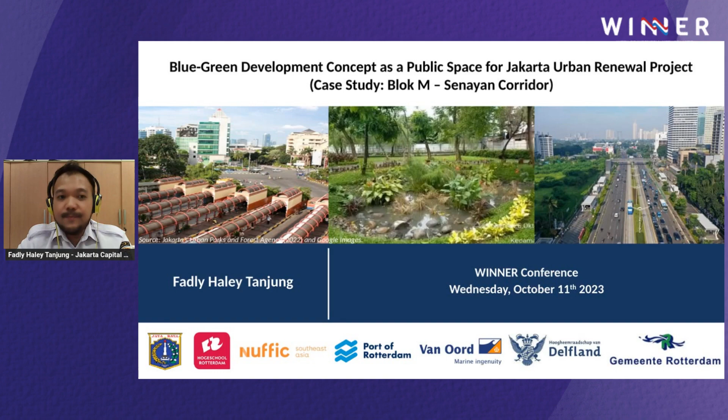Here's a glimpse of Indonesia, a tropical archipelago country with 38 provinces, with numerous urban population projections that are expected to reach around 319 million in 2045. One of the main metropolitan areas is Jabodetabek, covering Jakarta, Bogor, Depok, Tangerang, and Bekasi, with around 35 million people living in the metropolitan area.

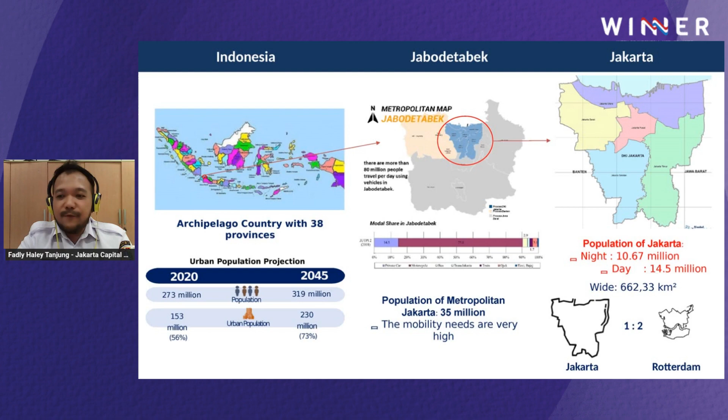Jakarta itself has around 10.67 million population during the night and around 14 million people during the day. It's around two times wider than Rotterdam's area.

Based on several studies from NASA, BRIN, and also INDEF, Jakarta has serious issues of groundwater, with as much as 40% of the city now sitting below sea level. The flood area will be approximately 160.4 square kilometers, or around 24% of Jakarta's total area, and it needs comprehensive mitigation and adaptation efforts.

Based on INDEF reports, around 10 trillion rupiah and more than 30,000 people spread across 264 spots will be affected by this flooding in Jakarta.

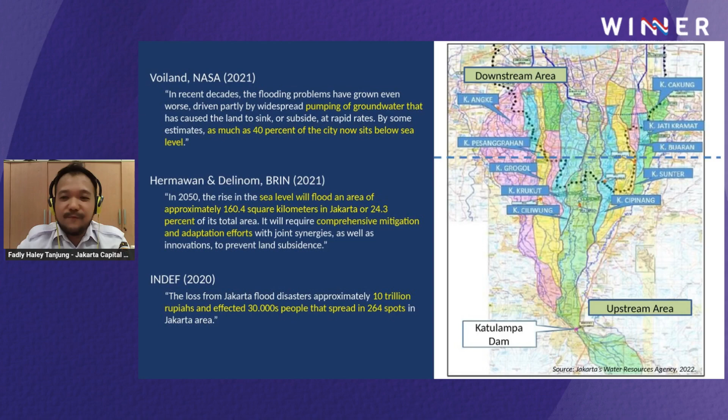Jakarta itself is also laid out by 13 main rivers flowing from the southern area, from the Bogor and Puncak areas.

Jakarta has some very strategic flood-related issues. First is the waterfront city concept—it used to be planned and designed with a canal system, and with this physical characteristic, Jakarta is home to water and floodplains.

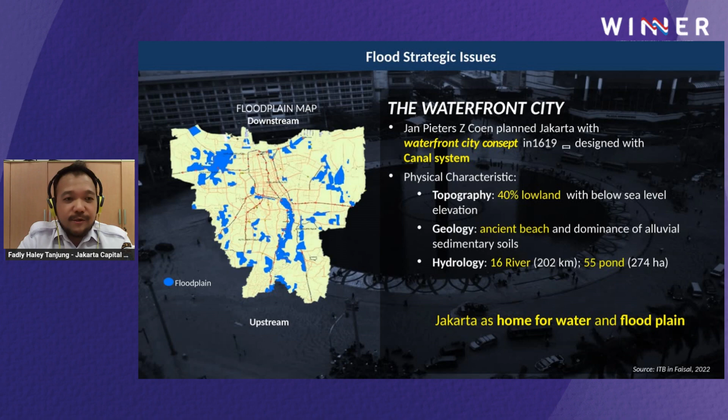The second strategic issue in Jakarta is water scarcity: around 80 to 85% of groundwater is below the national health standard of Indonesia. You can see on the map that the red areas have damage of more than 80% lowering of the groundwater level, and the raw water sources mainly come from the Jatiluhur Reservoir, with only 3% from the Jakarta River itself.

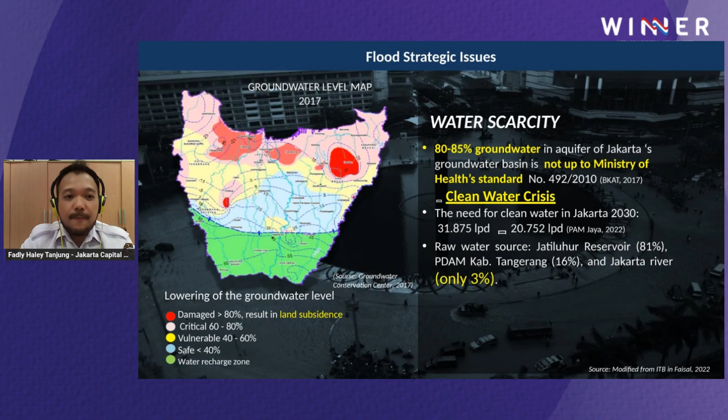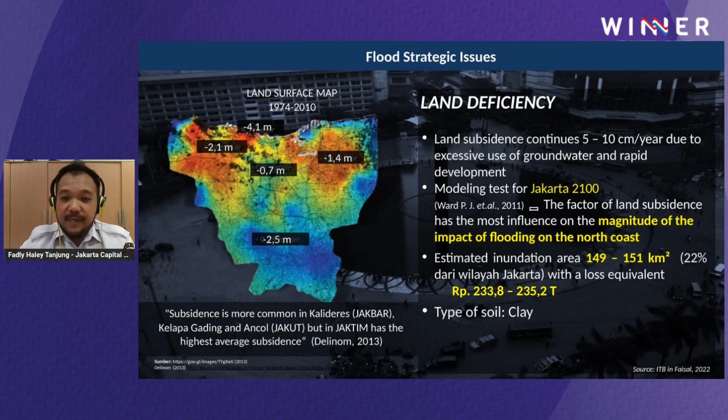The third strategic issue of flooding in Jakarta is land subsidence. Based on modeling tests for Jakarta in the year 2100, it is projected that land subsidence has the most influence on the magnitude of flooding impact on the north coast. It's estimated the inundation area will be around 149 to 151 square kilometers, with losses equivalent to more than 233.8 trillion rupiah. The type of soil in Jakarta is clay.

There's a planning paradigm based on simulations done by researchers, noting that green open space does not have a significant impact on reducing runoff discharge, so integration is needed through blue-green open space development.

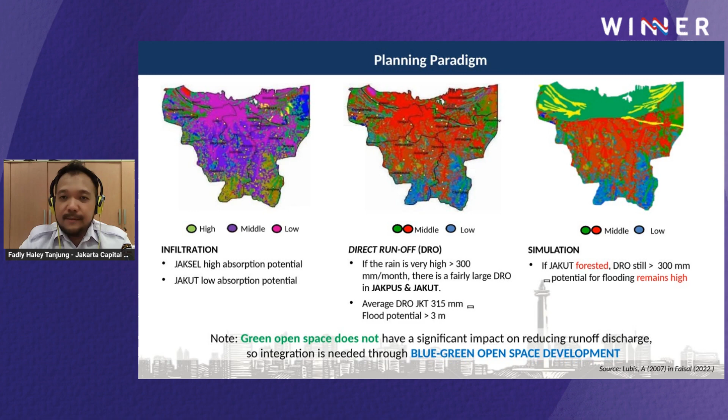Maybe you may have already known about the plan to relocate the capital of Indonesia, announced by the president since 2019. The national government plans to relocate the capital, and Jakarta will become a global city afterwards.

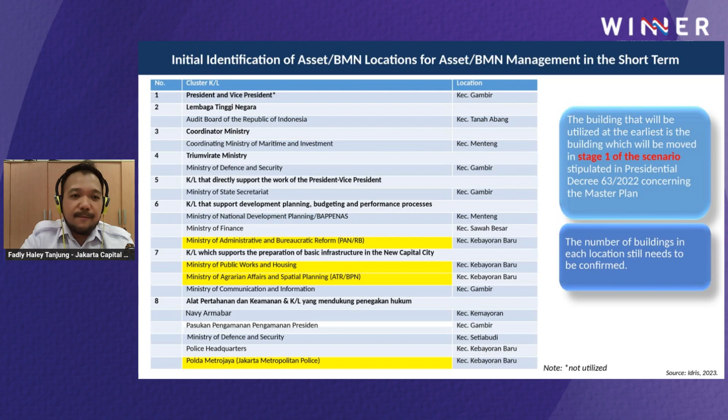Based on the initial identification of asset locations from the national government, several ministerial or government-owned buildings will be relocated in stages. The first stage of the scenario will affect four buildings that are included in my case study area, which is the Blok M until Senayan Corridor.

So this is my case study area. As you can see, there's this delineation approximately from Blok M until Senayan, and I chose this corridor because I think it's the more connected backbone of the area, and mainly the activities of this area rely on this backbone.

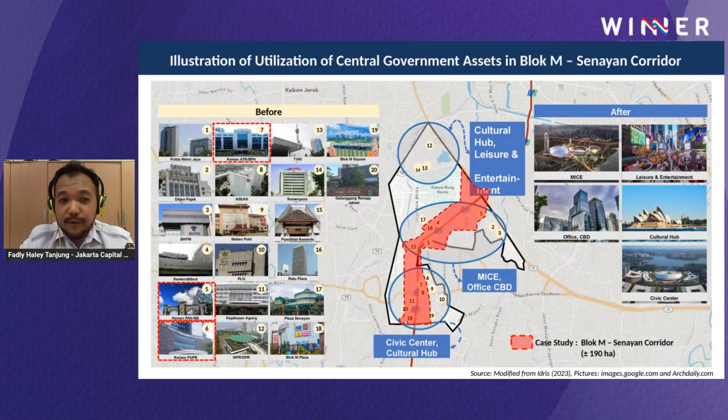So I chose the corridor that also consists of public transportations. The case study area is around 190 hectares.

So my basic research question is: how to plan a blue-green development concept as a public space in the Blok M Senayan Corridor. The purpose is to plan a development concept of this blue-green infrastructure as part of the Jakarta Urban Renewal Project.

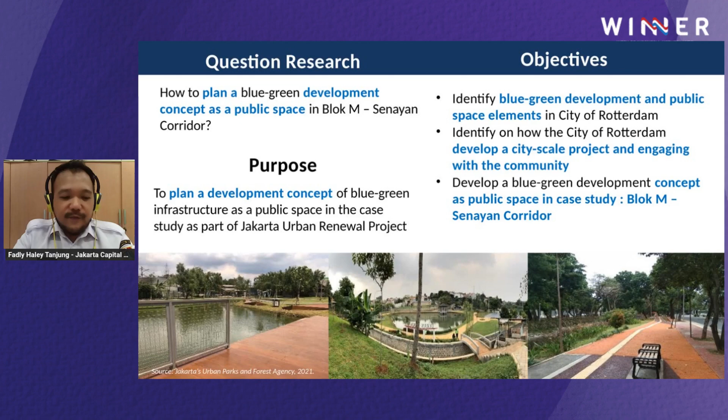So there are some problems I identified in this study. Some of them are that there are 3 sub-districts in the case study area that were still inundated during heavy rainfall in 2020 until 2021. There are also limited assets owned by the Jakarta Capital City Government, and the stakeholders within the case study area are identified as varied, regarding public, private, and individual ownership.

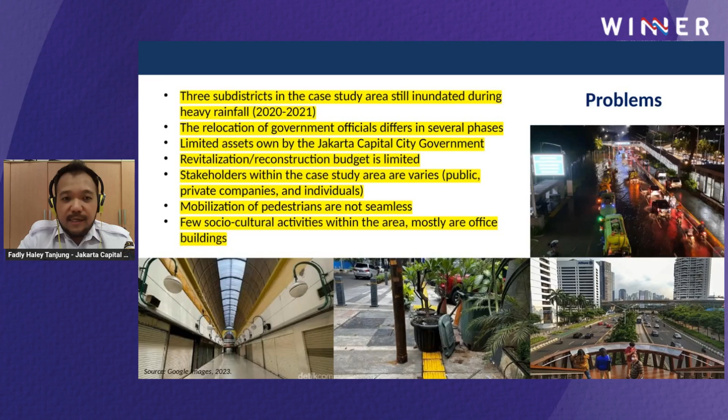There are also few social cultural activities within the area, mostly office buildings. But there are also opportunities inside this case study area, as some parts will be included in the CBD, which can be highly potential to become an economic engine for Jakarta toward becoming a global city.

It also lies near the ASEAN Secretariat, which is planning to develop into a larger scale. Currently, there are several strong activities in the case study area, for example the Gelora Bung Karno City Forest, the M Bloc Space, and the Martha Christina Tiahahu Literacy Park.

There are also some local regulations of incentive approach that can be drafted. It's also important to promote seamless mobility, which can be integrated with transit-oriented development or public transportation stations.

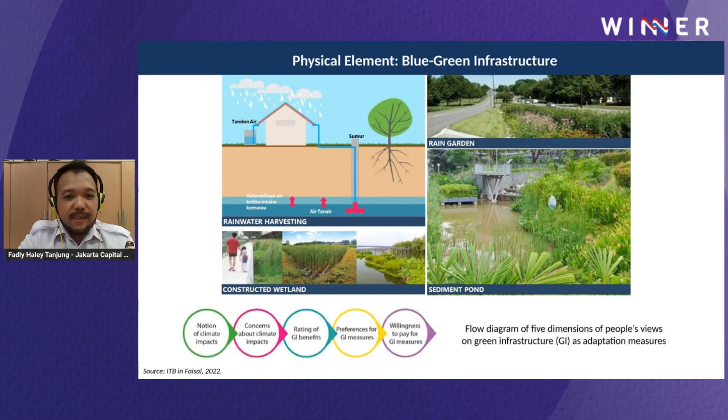So this is some theory I researched regarding the physical element of blue-green infrastructure, for example rainwater harvesting, constructed wetlands, rain garden, and sediment pond. There are also examples of porous asphalt or concrete and porous paving that can be used for pedestrians in inundated areas.

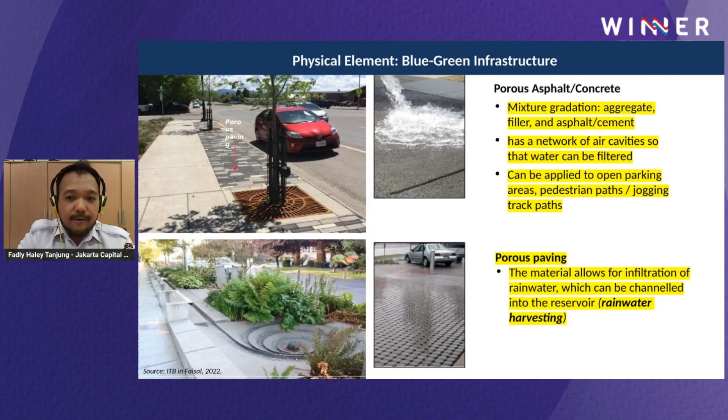These are some theories I chose about placemaking regarding the social cultural element, which is public space with placemaking as a third space development. Why third space? The first place is our home or living, the second place is our workplace or school, and the third place is between our home and our workplace or school. So there will be many activities between them, including leisure, recreation, and entertainment. This public infrastructure and amenities hold the key factor in creation of the third space.

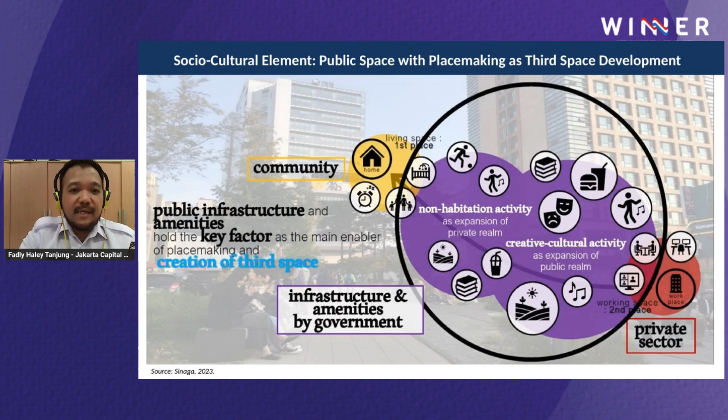So we dig into some locations that I observed during my internship in Rotterdam, identifying some physical and socio-cultural elements, as you can see in the presentation.

In Dakpark, for example, you can identify green wall and rooftop garden. There's an example of using sport activities and an amphitheater in the Benthemplein Water Square, which is actually an excellent example introduced by the city of Rotterdam to integrate urban water management and flood mitigation with urban space and public space development.

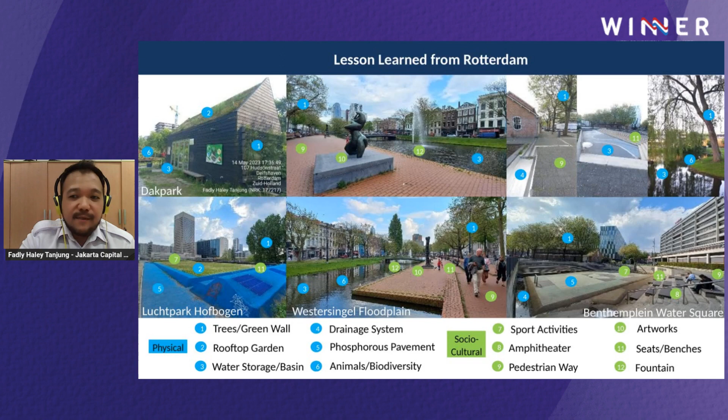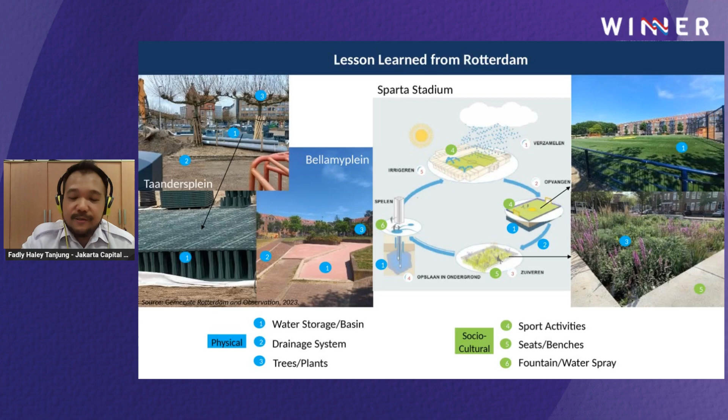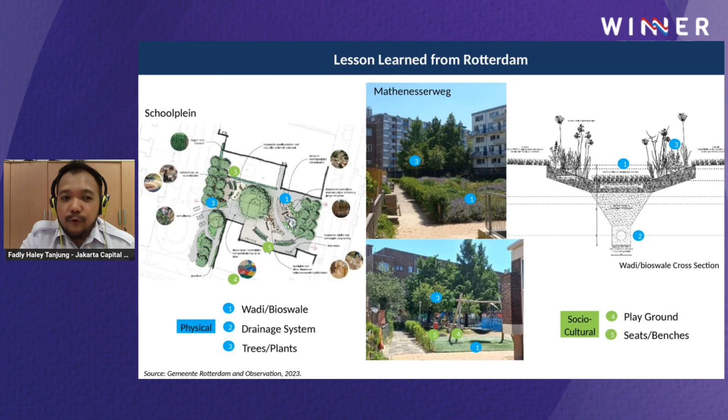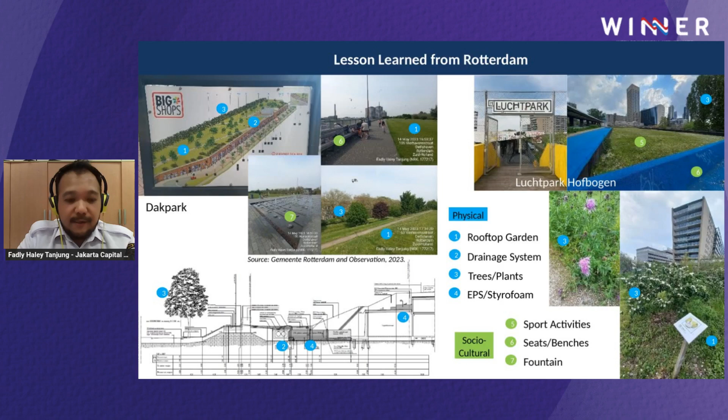So the city of Rotterdam built excellent examples of these urban parks, using buildings previously used for storage, and using EPS or styrofoam to maintain the soil above the building so it will not tip during development and during heavy rainfall.

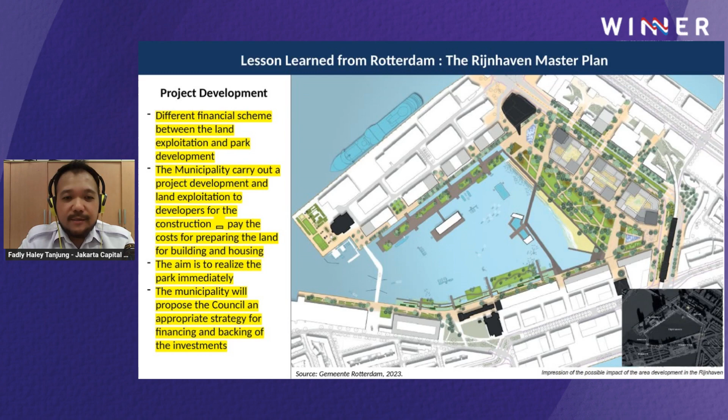Regarding the lesson learned from Rotterdam about project development, I identified some ideas currently conducted by the city of Rotterdam. One of them is the Rijnhaven master plan, which has a different financial scheme between the land exploitation and park development. The municipality carries out project development and land exploitation to developers for construction, and they aim to realize the park immediately while securing some funding by the municipality, proposing to the council to secure the financial scheme.

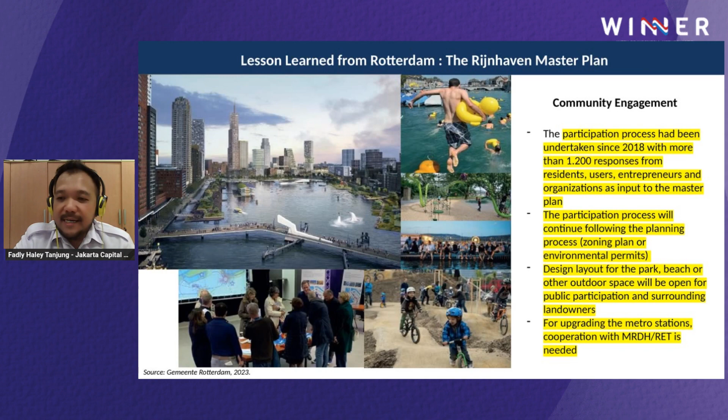Regarding community engagement on this project, the participation process had been undertaken since 2018, with more than 1,200 responses coming from residents, users, and entrepreneurs. So it's basically a very good participation example done by the city of Rotterdam for this large-scale city project. This is also a good coordination for upgrading the metro stations, cooperating with RET as the operator of public transport in Rotterdam.

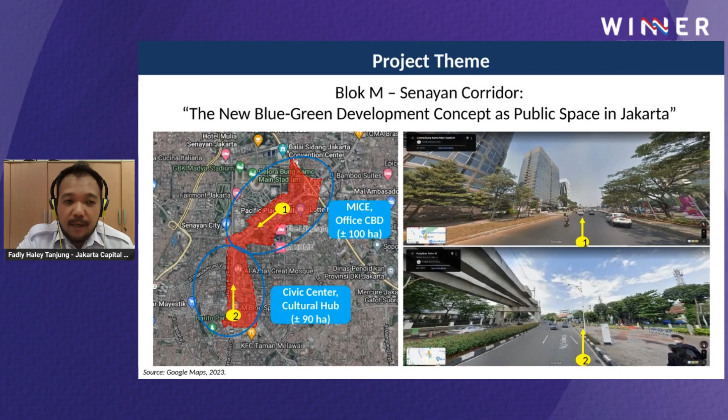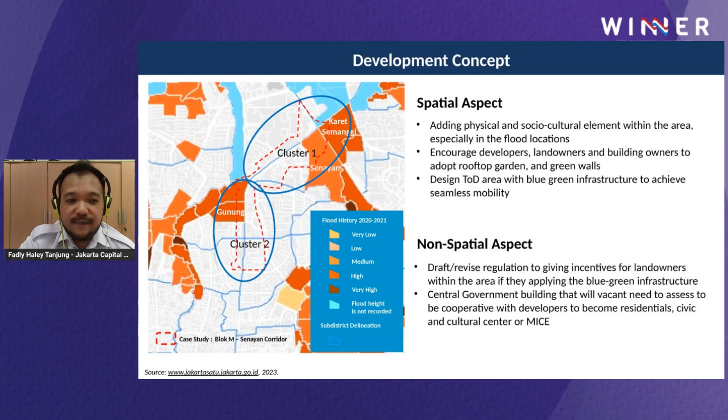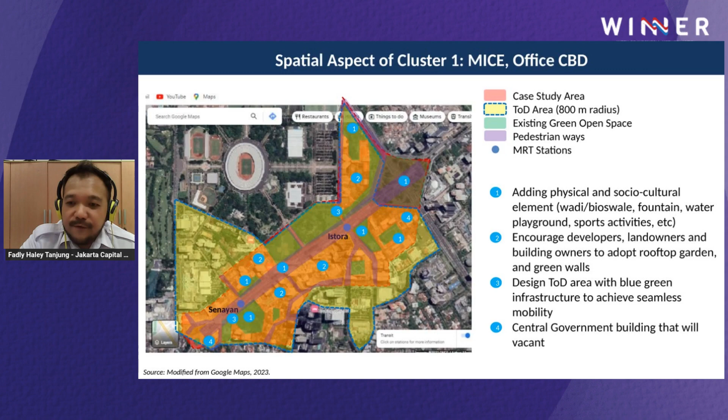So we're getting to the first cluster in the spatial aspects. I identified several examples in the existing conditions, so I'm suggesting recommendations in several spots regarding adding physical and social-cultural elements, encouraging developers, designing the TOD area, and identifying several spots of central government buildings that will be vacant.

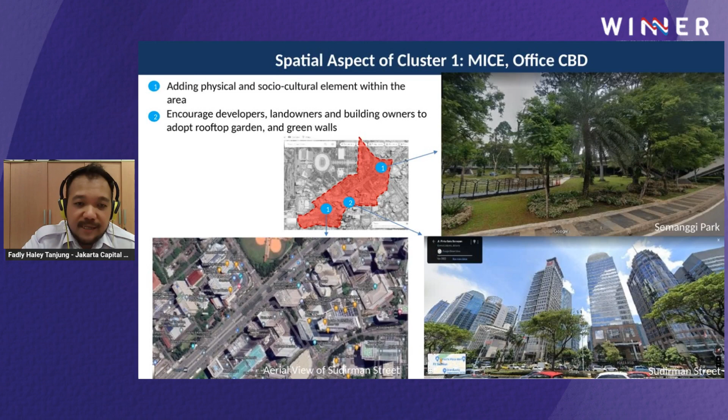This shows some pictures of these areas in cluster one: Semanggi Park, Sudirman Street, and some aerial views of Sudirman Street. I suggested adding physical and social-cultural elements in Semanggi Park with a water fountain, benches, more trees, and water elements, and adding green walls and a green belt in Sudirman Street, as well as applying green rooftop gardens above the buildings in the Sudirman Street area.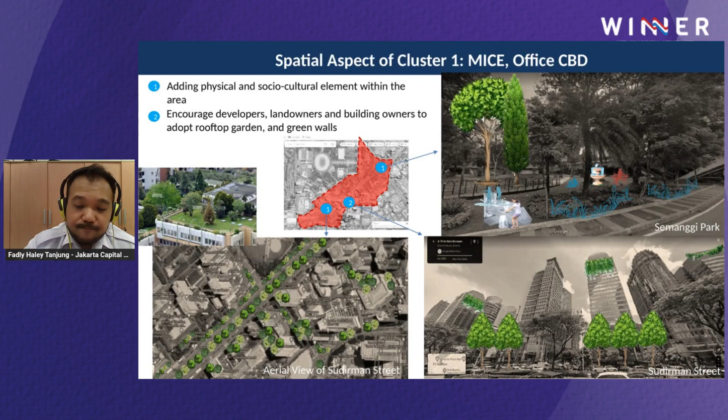Another example in cluster one regards the Ministry of PAN RB, the bureaucratic ministerial building. It can be redeveloped or revitalized into a new building using the compact city approach, possibly built into a new landmark—for example, like the Depot building in Rotterdam. In the parking lots, water storage or water crates could be introduced to store water during heavy rainfall, because this area is close to the inundation area of the Gunung sub-district mentioned before.

There are also suggested illustrations for Sudirman Street, adding green belts, trees, and bushes, and for vacant land currently owned by private sectors, which can be cooperated with to also introduce water elements in their area.

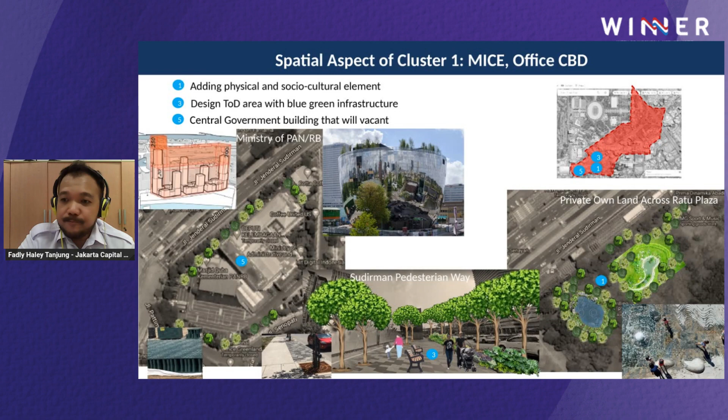So in cluster two, which will be planned into the civic center and cultural hub, I also identified some areas here.

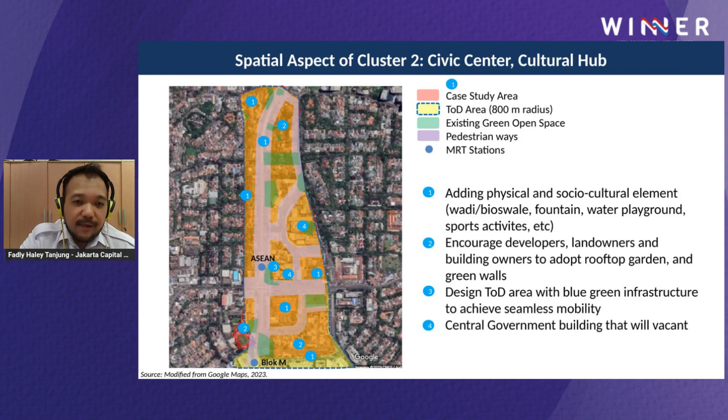There are two MRT stations in this area, the ASEAN and Blok M MRT stations. First, there are several locations of the Ministry of Foreign Affairs owned by the central government, and also some high schools, SMA 82, owned by the Jakarta provincial government, that can introduce the same concept as the Benthemplein Water Square in Rotterdam, or introduce some rooftop gardens.

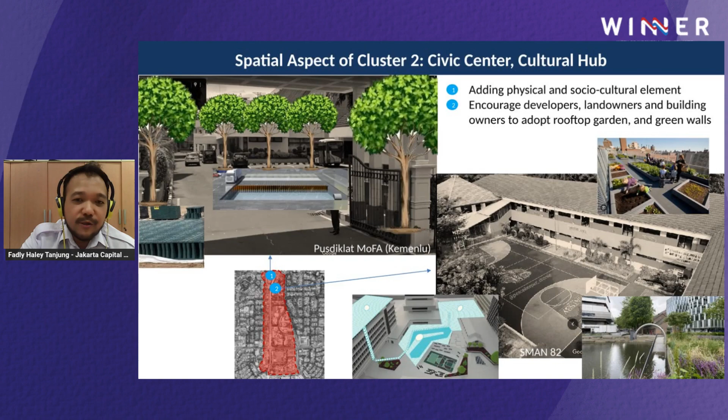Since it is located in the inundation area, it can be suggested to adapt the concept of urban water storage. These are some examples I illustrate for the redevelopment of the ministerial building, for example the Ministry of ATR or Spatial Planning Ministry, and also adding some social-cultural elements in the Blok M area and a pedestrian way at the entrance of the Blok M terminal.

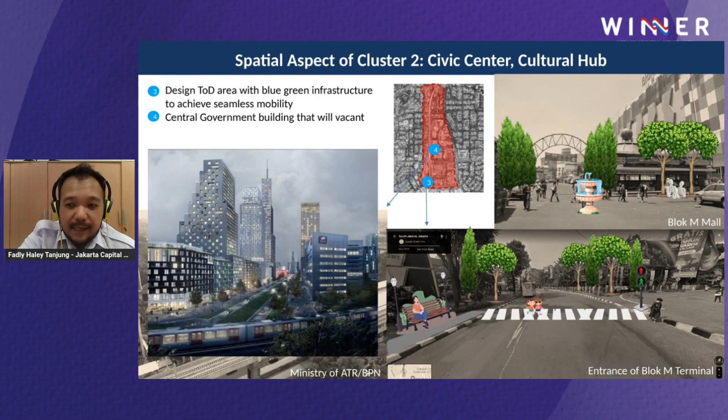Regarding project development and community engagement of this case study, I suggest a specific project development team is needed, and the municipality needs to propose to the council to allocate budget for the master plan. The aim is to realize several public spaces in the area immediately. The 4 potential central government buildings need to be assessed as residential, civic, or cultural center, also need to be assessed with the central government, and they need to draft the incentive regulations within the area and its surroundings.

The next part is community engagement. After the master plan is drafted, it's important to conduct workshops and open public participation in all media, especially targeting inhabitants and other stakeholders from children, women, youth, diffable within and surrounding the area. Detailed designs for public space using the blue-green development concept should be open to public contests. There is also potential participation by landowners who can support seamless mobility to the TOD area and new public space development.

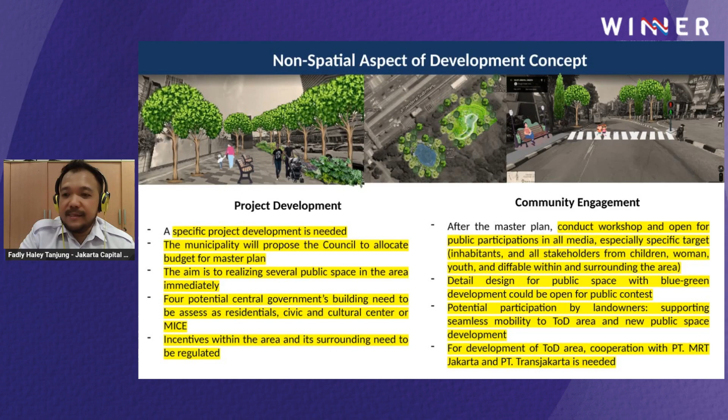It also needs to be cooperated with public transportation operators, for example PT MRT Jakarta and PT Trans Jakarta.

So this is my suggestion for the action plans of the project, from the short term - the first 2 years - to the long term, the third year until maybe 10 years ahead. First, I suggest forming a specific project development team, to allocate budget and draft the master plan, etc.

In year 2, it's important to conduct public consultation workshops. The campaign in all media should be started. Regarding the 4 central government buildings, the best utilization should already be decided, and the incentive regulations already set.

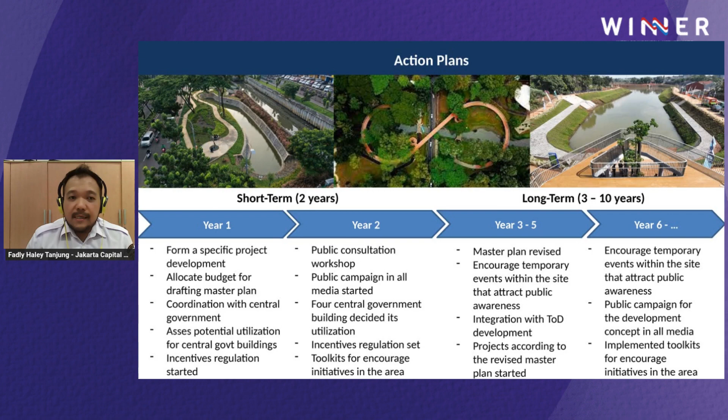In the long term, it's important to revise the master plan due to the needs of the people and the area itself, and to encourage temporary events within the site that attract public awareness, and to integrate the stations within the area to develop it with the TOD, or transit-oriented development, concept. It also needs to be maintained in the longer term after this.

These are some initiative toolkits that can be adopted by landowners and individuals in the area, for example introducing white roofs, water gardens, water playgrounds, water elements for evaporation, vegetation fences, and water permeable pavements.

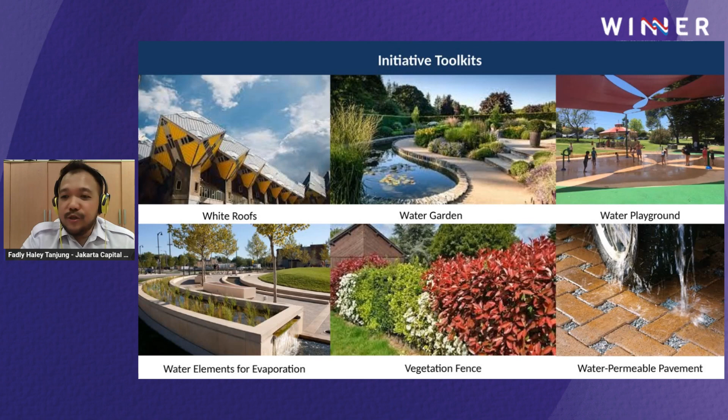Hi, Johan. Hi, Haley, and good day to everyone. Thank you very much for inviting me.

It's good to be here, and I would love to share some insights from Rotterdam on climate adaptation.

My name is Johan Verlinde, I'm the program director for the climate adaptation program for Rotterdam. I also do a lot of international cooperation on this topic, because as a city we like to learn from other cities around the world, and we like to share what we are doing, working together and sharing knowledge. That's really important - we all face the negative effects of climate change, one more than the other, but we really need to learn from each other.

Today I'm going to tell you a little bit more about our adaptation strategy, our international cooperation, and then I hope we have a discussion afterwards.

Rotterdam WeatherWise is our latest adaptation strategy, and it's really about adapting the public space, the private space, but also behavior, because we all need to work together in a city to make our city climate proof. A little bit more about the background of our city.

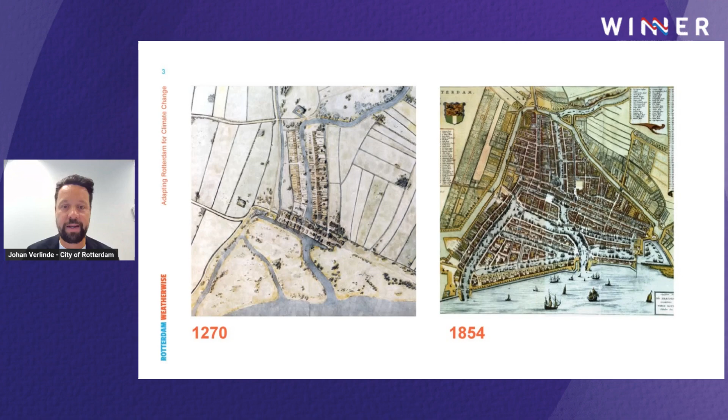So water is always in the DNA of the city, and Rotterdam always was a water city. We had a lot of canals in our city. But in the beginning of the 20th century, a decision was made to transform Rotterdam from a water city into a car city, because the car came to Rotterdam. Then the city council said, okay, let's fill up all our canals and transform them into roads.

So that's quite problematic. We don't have almost any surface water within the city, which means that rainfall is a huge problem, but also heat is becoming more and more a problem, because all that pavement, all the concrete, heats up during the day and radiates the heat at night. Buildings cannot cool down. And in the Netherlands, we are mostly focused on cold, so we have central heating but no air conditioning. So heat is also becoming more and more a problem in our city.

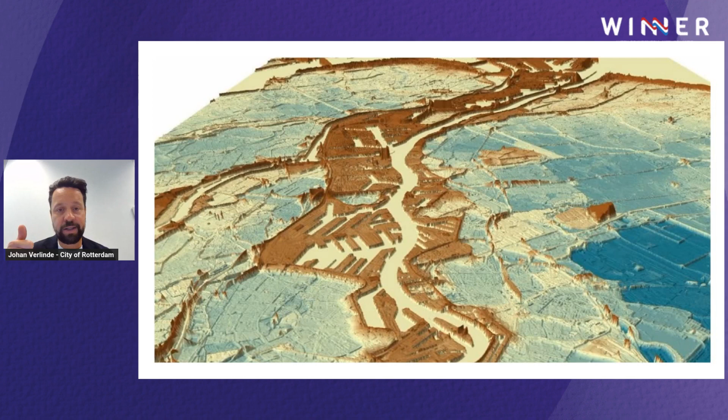But with climate change, we see higher rainfall intensities, more heat, longer heat waves, and it really has a strong effect on the livability in our city.

So we really need to work on the adaptive city, and we are doing that already for years. The current adaptation strategy is called Rotterdam WeatherWise, but it's the fourth iteration of our adaptation strategy. So we are working on this for years and years.

And I think the strong element on climate adaptation is multifunctionality. So it's not heat - it's not hot the whole year. It's not raining 100% of the year. So making sure that it acts as a reduction on the negative effects of climate change for one part, but also is an addition to the public space or an addition to the buildings in the city.

On a very detailed level, we did all the modeling, so we know on a building level what kind of problems will occur. Will flooding be a problem here, or rainfall and drought, or maybe only land subsidence and heat? So for every location in Rotterdam, we know what's going on.

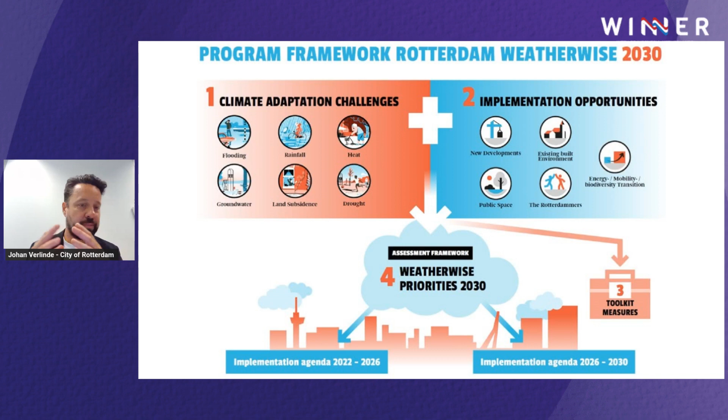And the dot on the horizon is 2030. So by 2030, our program is done, which doesn't mean that climate adaptation is done, but then climate adaptation should be a standard for everyone that does something with an impact on the city. So the city government, the citizen, the real estate developer, they all know what they have to do.

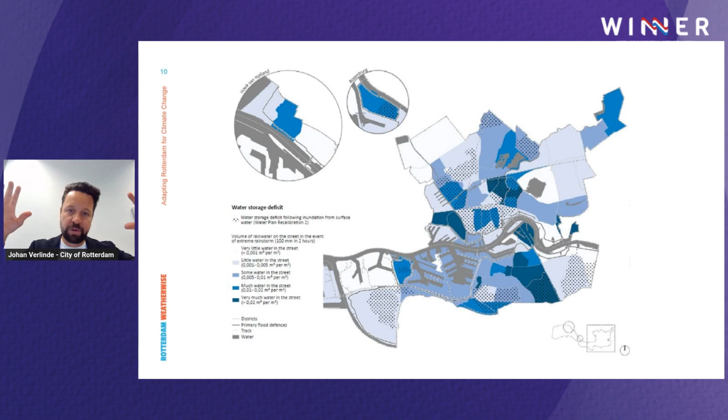And this is one of the maps. We have maps on a city level that shows you where there are problematic neighborhoods. So this one is on rainfall: where do we have a problem with water storage? Where is the water storage deficit? Which means in case of heavy rainfall, there's no way we can store the water. And the more blue, the bigger the problem is. So this gives you some overview of problematic areas in Rotterdam.

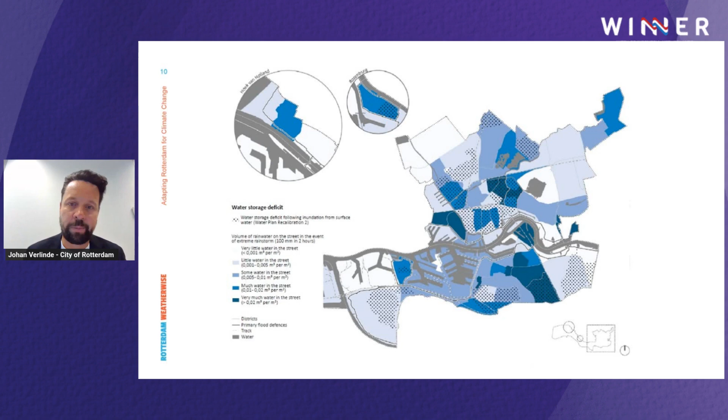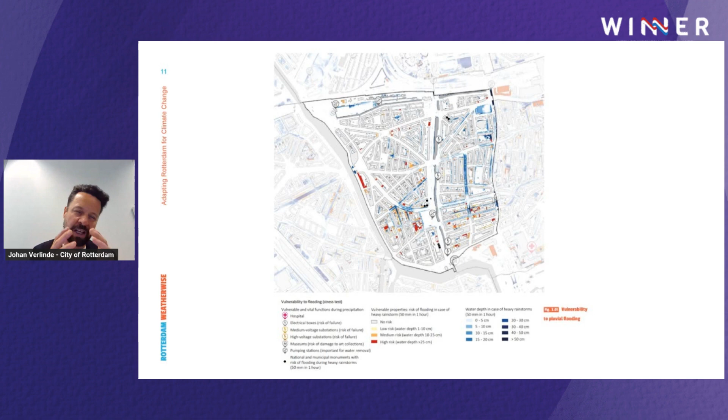And you also see the energy, electricity boxes, hospitals - they're all mapped on these vulnerability maps. And we have 15 of these for every neighborhood on different themes, which gives you a really detailed overview of what's going on in this neighborhood.

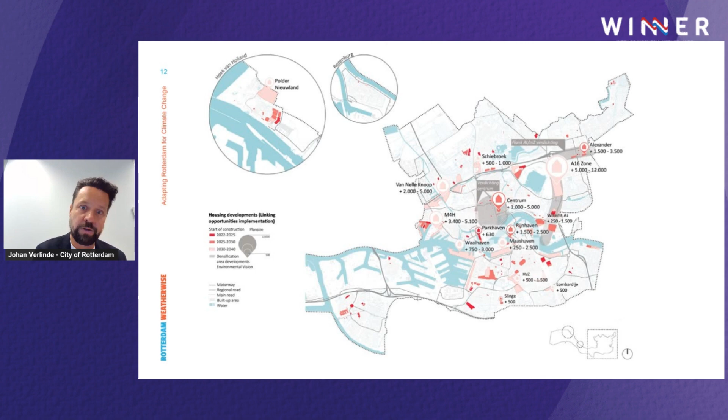And this is an example of a map that shows you where we are going to develop in the next few years. So all those buildings are a threat to the city if you don't do it in a good way, but also an opportunity to make those buildings climate proof from the beginning.

Well, let me give you some examples. And Haley already showed some of them in his presentation, which he adapted to his local case in Blok M.

And the first one is the water square. We started with this 12 years ago. We have now a lot of these all around the city. And it's about storing water, but also making the public space more attractive.

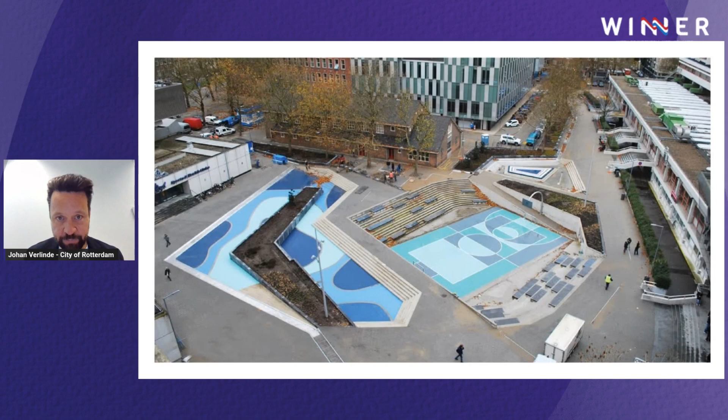And this is one of the squares in Rotterdam. It used to be totally paved with all those concrete stones, so a really dull and boring square in the city. But it was also a problematic area where we have a lot of problems during heavy rainfall. And then we invited all the potential users of this square - there's a school, there's a church, there are people working, there are people living there.

And we invited them all. And we said, okay, we want to make the square more attractive and we want to store water. So we ask you, what kind of functions do you want on this square?

Well, that's combined, so there are 3 reservoirs. The middle one is used for sports. Then there's a small one on the top right, and there's a stage because there's a theater school and they wanted a stage. The reservoir on the left can be used for skating and BMXing. And even the church has services on Sunday in the biggest reservoir.

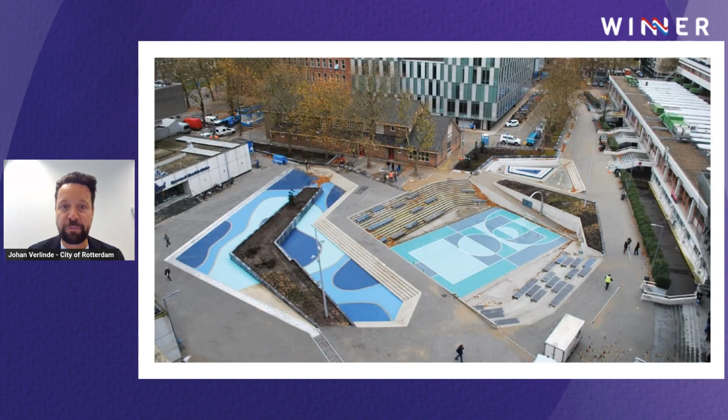But when it starts to rain, we can store 1.7 million liters of rainwater in here, which reduces the stress on our sewer system. After the rain event, it doesn't flow to the sewer system, it's infiltrated into the groundwater, but it's only used 5% of the time. The other 95% of the time, it can be used for all those different functions.

So when it's raining, it looks like this. You really see the water flowing. And it can stay in the reservoir for 24 hours, also because of health issues. After 24 hours, gates are opened and water can infiltrate into the groundwater.

And when the weather is good, it looks like this. So kids from the school have their lunch, it's used for sporting. And we have 10 of these around the city, and they all look completely different because every citizen or neighborhood has its own needs, so they're always tailor-made to the local conditions.

One of the bigger ones, and also new for us, because I mentioned water is always in the DNA of Rotterdam, but we always also saw water kind of as a threat to the livelihood in the city. So what we did is drain the water and get rid of it as soon as possible, making sure the city wouldn't flood. But now, with climate change, we are experiencing more and more periods of drought, which will also have a big impact on our fresh water supply. So we should also think about circularity and reusing the rainwater that falls on our city.

But the problem is, it rains in one month and you need the water in another month. So can we somehow connect those two dots? That's what we did with the concept of the urban water buffer. And the first one was implemented near a soccer stadium.

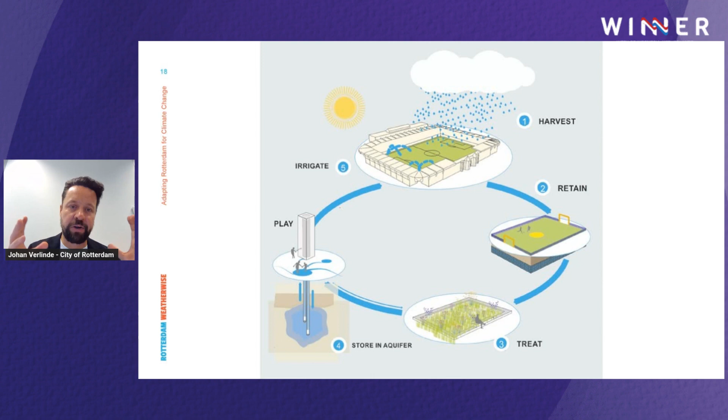So you can fill up the aquifer with the cleaned rainwater, and once we need the water, we pump it up. It has an efficiency of 65%, so you cannot pump up everything that you put into the aquifer. But it's really beneficial because now we don't need to use the precious water from the tap, we can use rainwater to irrigate our soccer field.

And we now have several of these around the city. This one is for a soccer field, but we also do a lot of greening projects in the city where we add a lot of green. But that green also needs to stay green, so we also use the harvested rainwater to water the plants.

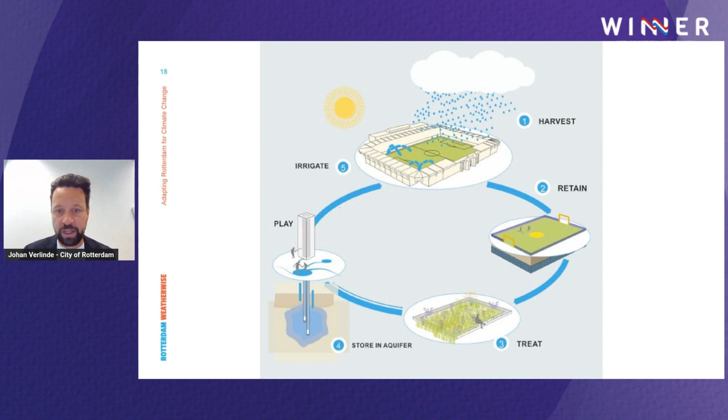And the last one, we have a big conference center now, and they also added an urban water buffer. So now all the toilets are flushed with rainwater, but also the whole perimeter is cleaned by rainwater. And I think this is really something we will see a lot in the near future because of drought in the city.

Most of these projects are in the public space, but the biggest part of the city is private property. In Rotterdam, it's around 40% public, 60% private. And we cannot fix the problem of climate change only in the public space. We really need everyone to work together with us—building owners, real estate developers, investors. That's why we put a lot of effort into real estate development.

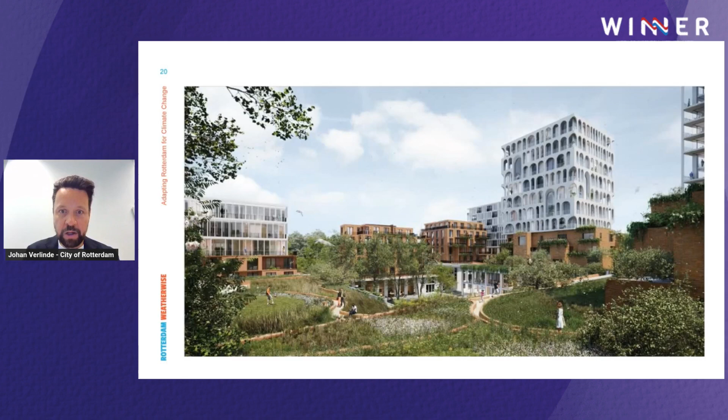We are putting in our building codes that you need to store water, that you need to add green. This is one of the developments—still an artist impression, but it's being constructed at the moment. We say you need to store an amount of water, but we don't say how an architect or developer needs to do that, so they are free. If you do it in a creative way, it's also very attractive to the building, because the green you see here is not on the surface, it's elevated, on top of the roof.

So you create an extra public space on top of the roof of these buildings, which is really nice because people can walk there, relax there, but it also stores water. The green evaporates, so it also cools down the buildings and the area. By doing this, every building in Rotterdam from now on will be built in a climate adaptive way. And we do big projects on a neighborhood level, also on the city level, with big water storages.

But we really shouldn't forget the citizens. So we put a lot of effort into engaging our citizens. We start dialogues with every neighborhood in our city, because every neighborhood is different, and the people living there are different. We tell them the challenges we face as Rotterdam—we live below sea level and everything is going on, but a lot of people living in Rotterdam don't even know that. So they should all be aware of the responsibilities they have by living in Rotterdam, but also that they can do a lot together with their neighbors, greening the streets.